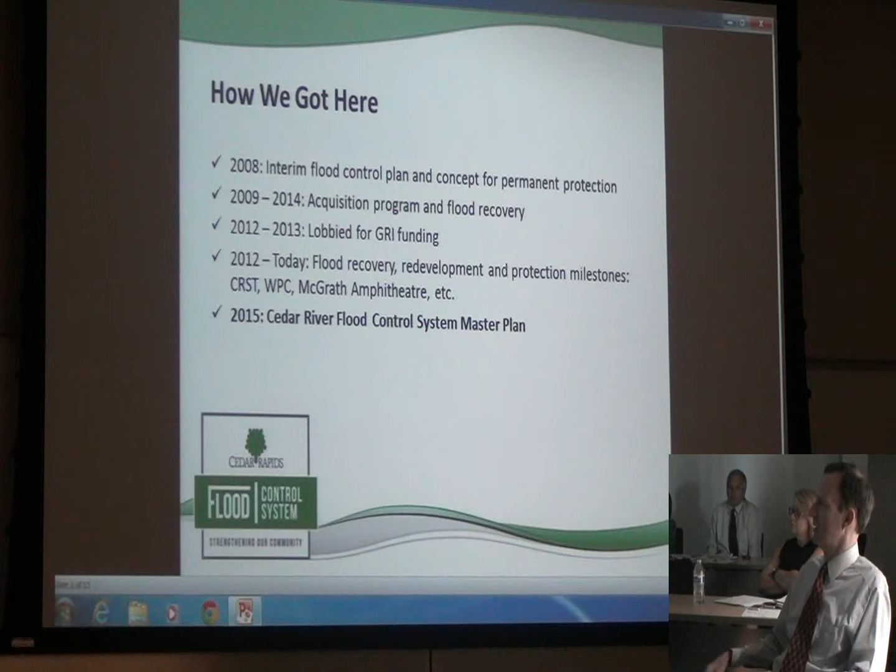And we've basically finished, we're out of the recovery, we've finished all the buildings. This was really one of the last ones. We're sitting here in the 2012 to 14 timeframe, finishing the buildings. And in December of 2013, we got the GRI approval, and the agreement was executed in January 2014. Now this is the culmination of, okay, we've got a funding source, let's get that master plan in place, because really before we had concepts, we had an idea what we wanted to do, but now that we have the funding source, we really need to validate what we were about to embark upon.

Next slide. So what is this document, this master plan? It's a guide for our construction for the next 20 years, which is the life of the GRI. It's going to give City Council direction on key policy items that will help the design team proceed with implementation of the flood control system. One of the things that's really important to note, I just said 20 years, there is no way this document is going to remain unchanged in 20 years. It has been set up to be changed, modified, amended, and have sections added as new policy items may come up.

It's also a tool for communicating to the public. Your question is? Rob, I don't know exactly in your presentation how much of this is stuff that we had to get state approval on when they approved the GRI originally. They have some say in what we do, to some degree, so it's not just something we can do all on our own.

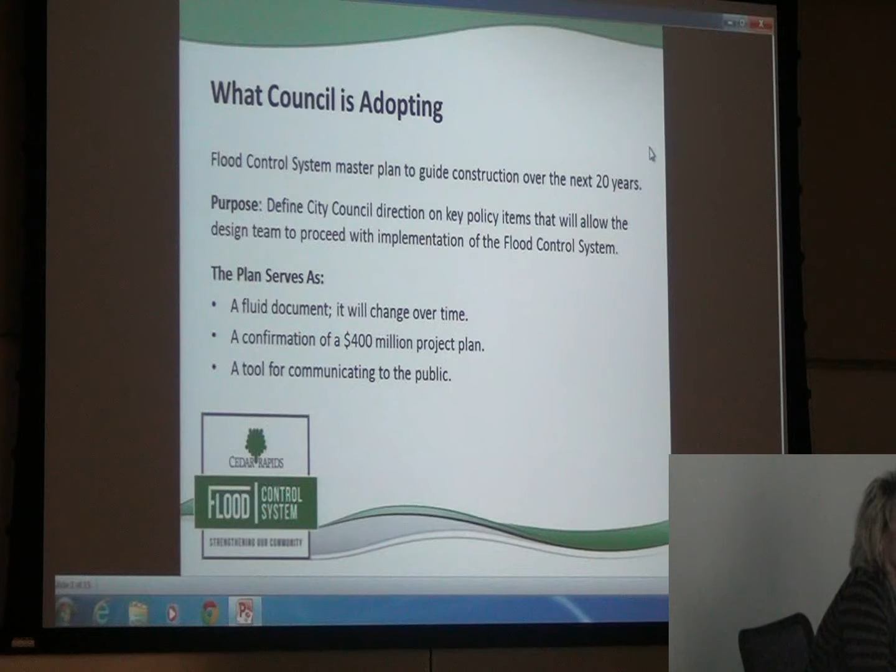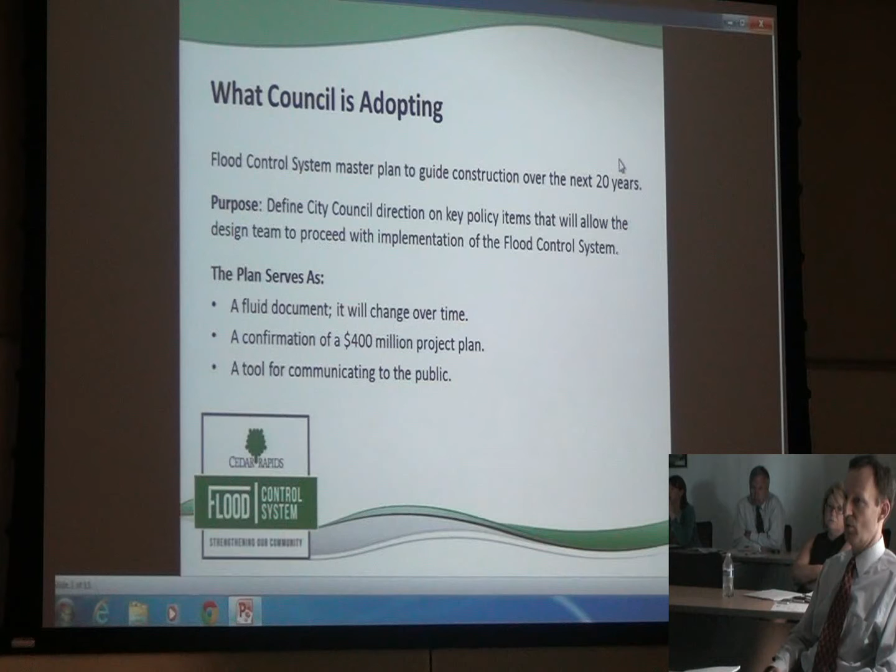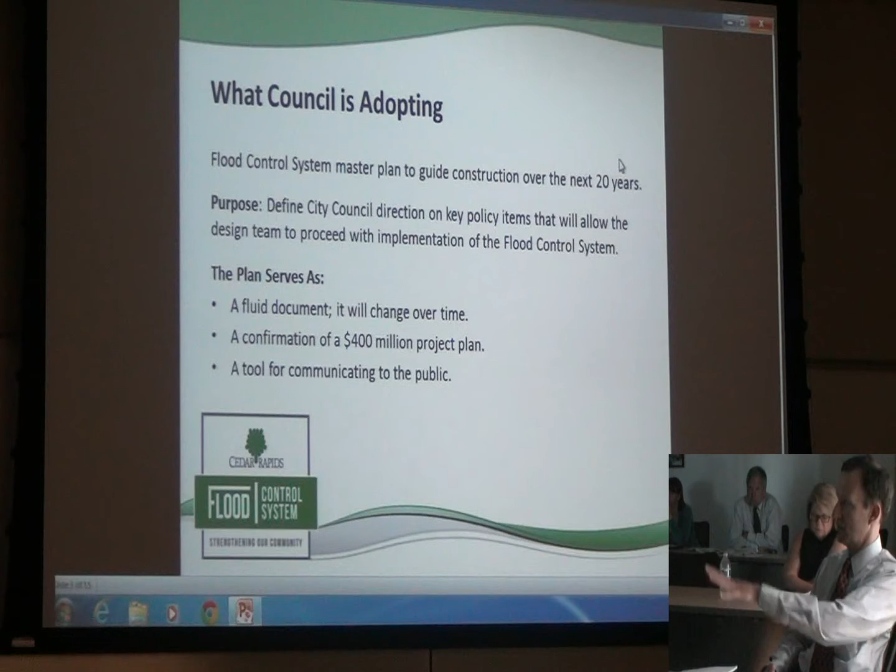Well, what I can tell you is you're absolutely correct, and this presentation I'm giving you today, I spent 2 hours with the state last week going through this document to make sure they are also on board, because they're paying 50% of the freight of this with their programs, essentially. So that's a very good point, and we will keep that relationship going so they understand what policy items are involved. They were very comfortable with this document, complimentary to the effort. So I think you have their endorsement, the state staff's endorsement, to move forward with this. And then what we will do after this has been adopted, we will upload this to their system so that all the flood mitigation board members can read it.

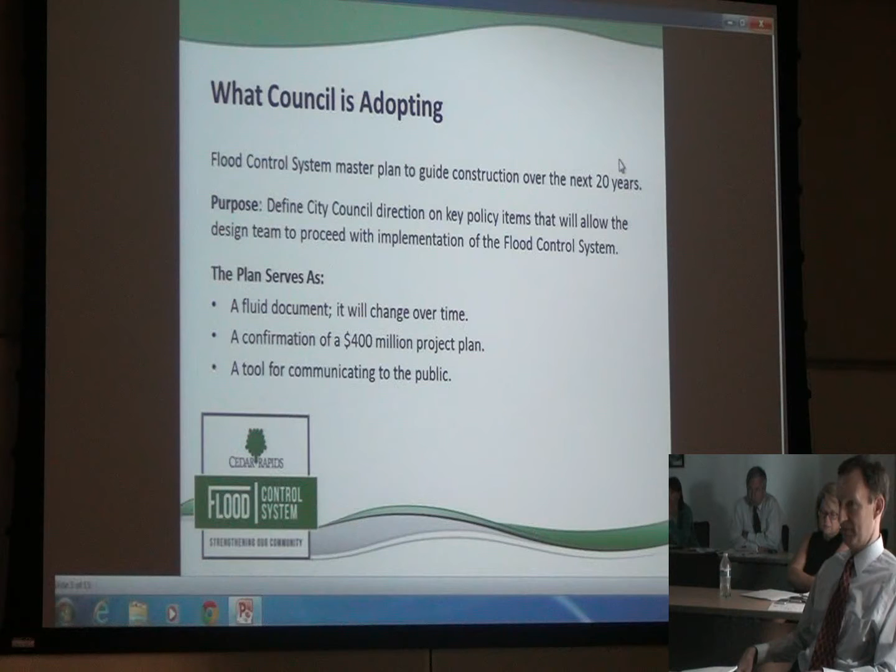Thank you. So I guess we can add tool for communicating with the state as well, Emily. So what does the master plan include? Well, it's set up in a series of chapters so that we can add chapters or add policies as items come up, so we don't have to redo the entire document. It's much like design standards or even the state code. When the state used to have state code, you'd have to replace certain sections, but they didn't reissue the entire book.

The initial adoption has an introduction, which is chapter 1, then an executive summary, then it goes into the actual plan, which is listed here as the alignment. It discusses what is recommended in terms of a wall, a levee, or a combination removable and permanent wall, where gates are proposed. It also talks about the height of it, and not only the physical improvement scope, but also where the project area is.

That's the area that's needed for operating the system, such as pump stations, temporary easements, or contractor staging areas to build the removable walls.

The other sections, obviously budget is important. That follows right after the actual plan. This is slightly out of order from the way the book shows. Then there's a section on implementation, which tries to lay out a roadmap for the sequence in which we're going to build these sections. It's divided into 8 sections plus Edgewood Road bridge approach.

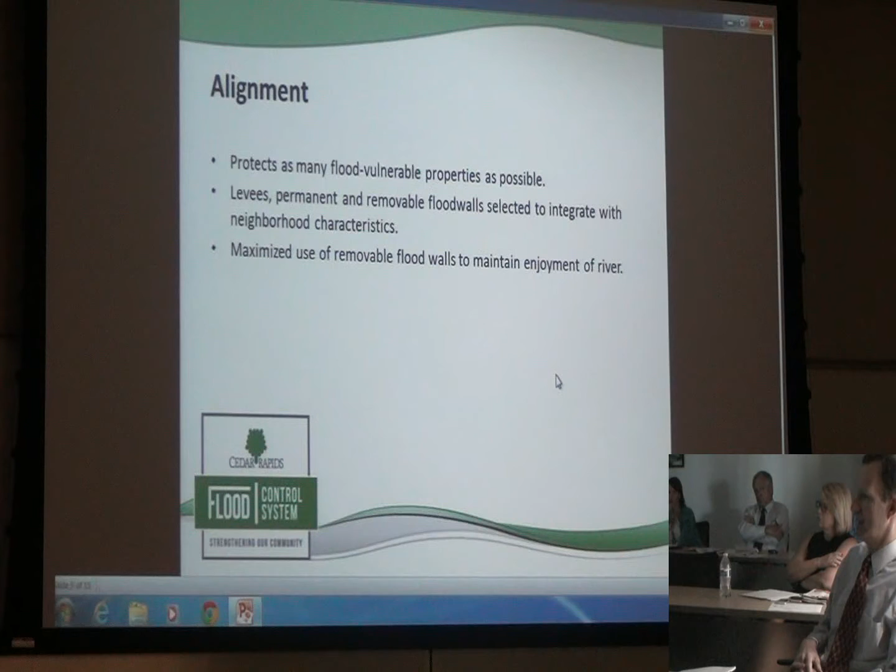Some of the considerations - this wasn't just done with a few people in a back room. I'm sure everyone knows this because we've had very significant public outreach. We've had 2 open houses. Council has provided guidance. We've had environmental reviews. We've had the State Historical Preservation Office review.

Significant discussions with the U.S. Army Corps of Engineers, as the east side is eligible for federal funding. It's not yet appropriated. We've met with the private and public utilities. Some of the other things were the view sheds. We've also talked to the property owners on both sides, individual meetings as we've gone through this, to get concerns and opinions as well.

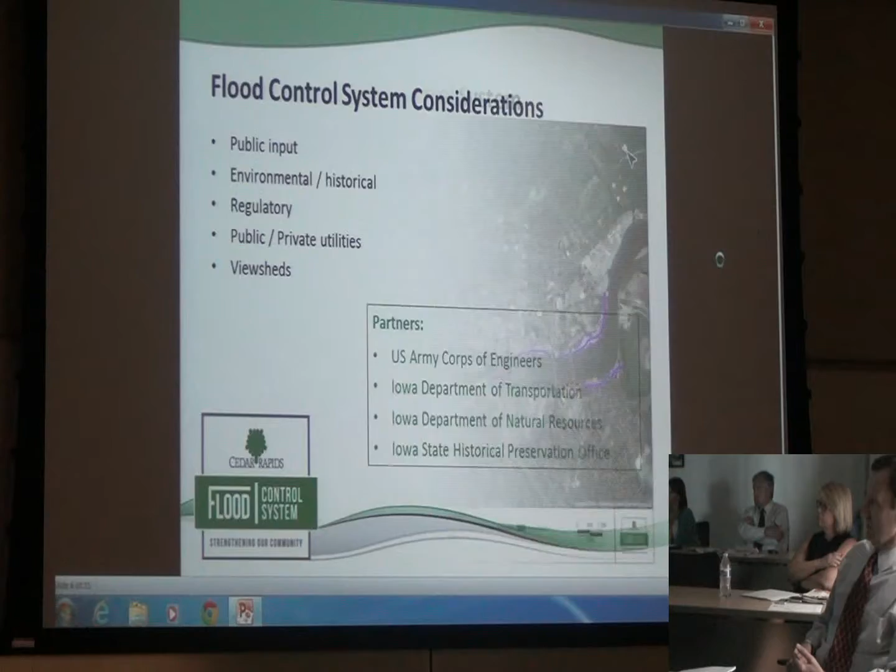So that leads to this map. If anyone wants to look at it later, there's the board right behind Rob and Cash here after we're done with the meeting. But this is essentially what's shown in the executive summary.

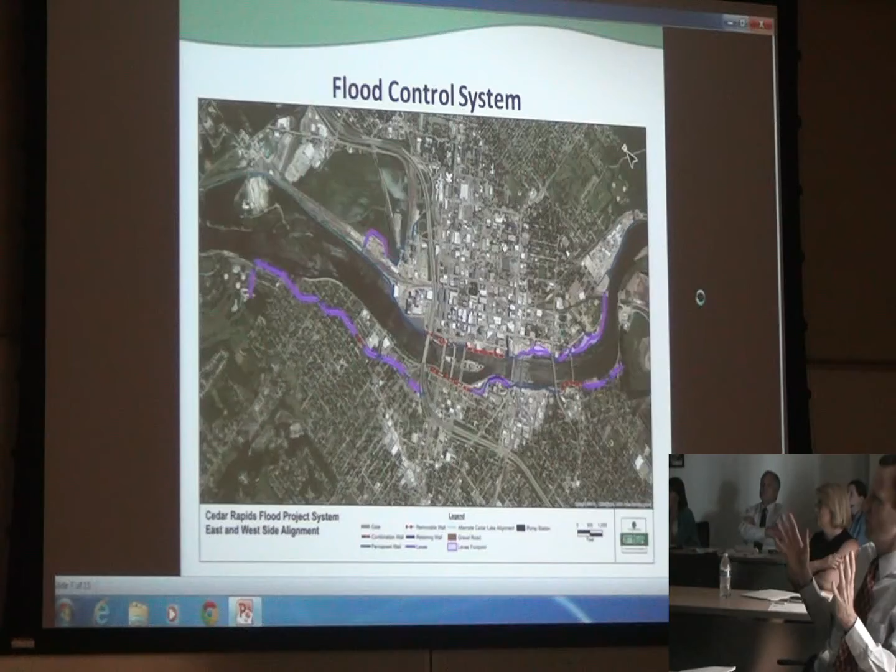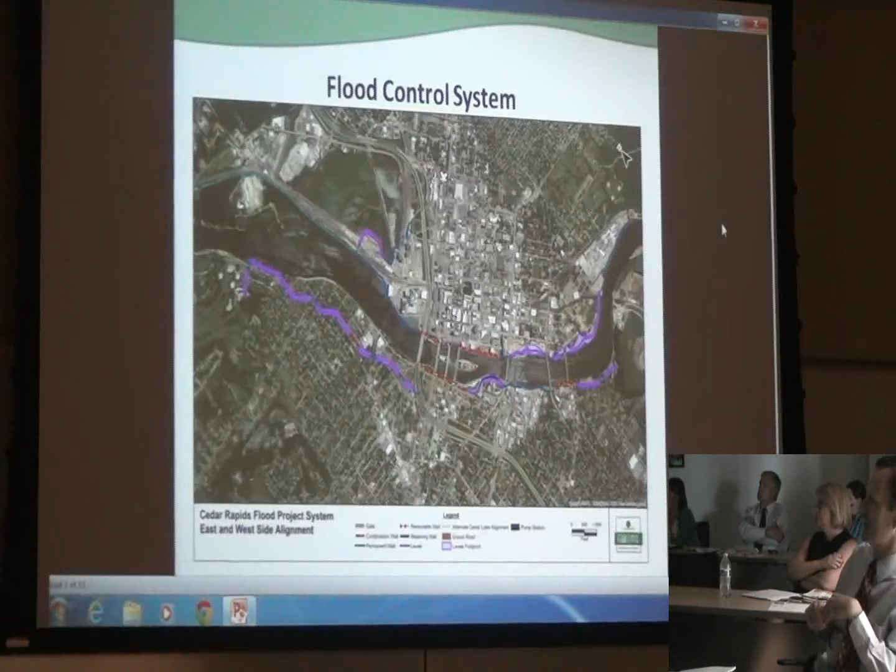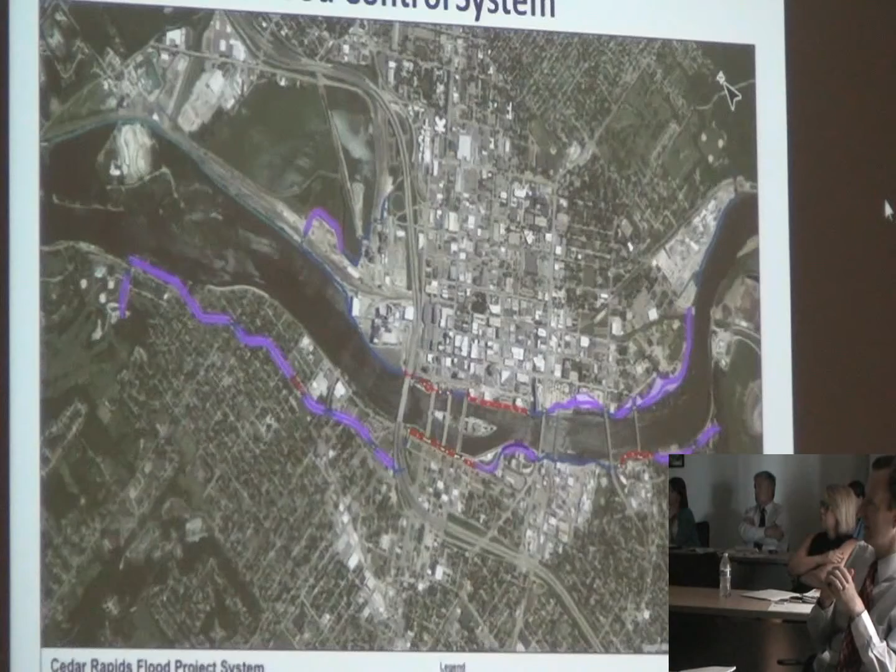That's the plan. The purple is the levee structure. Kind of hard to see all the different colors here, but the red is a wall, and there's gates, and then there's some kind of multicolored one which shows where the removable walls are. And as you go up from the Quaker Oats area, there's a dashed line that shows the option to continue this north along the railroad isthmus by Cedar, and protect the Cedar Lake as well as the Shaver Road area. But that's essentially, in a nutshell, what the system is.

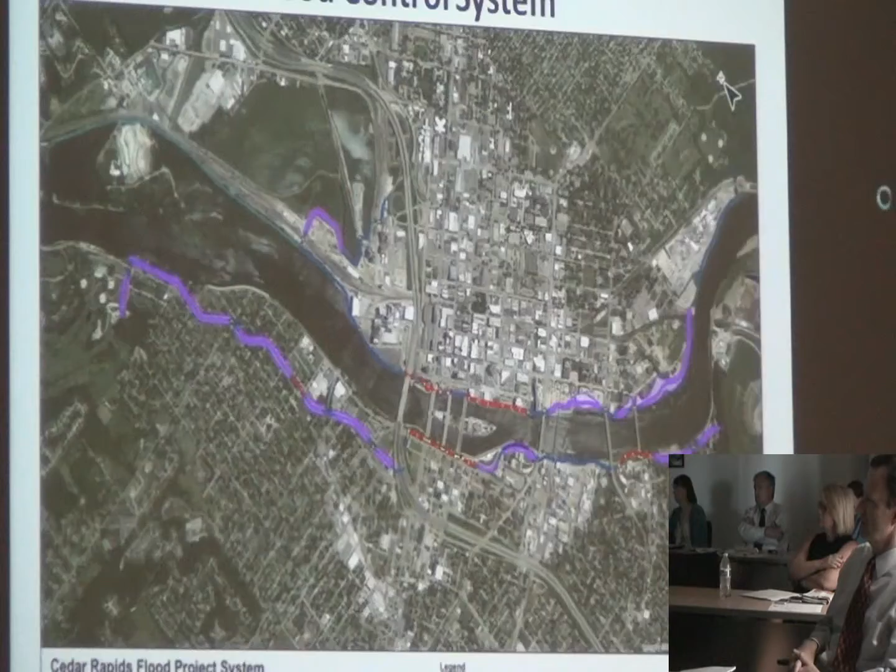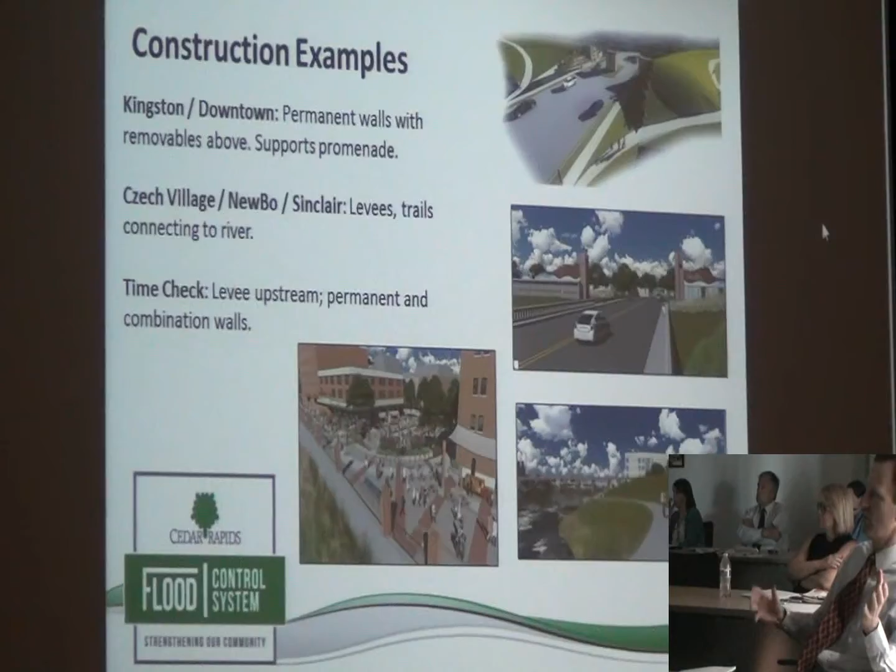This is a pull out right from the executive summary. Some of the highlights of where these different features go. In Kingston and downtown, there's more permanent walls with the removables above them, as there's more access to the river there. Czech Village, Newbo, and Sinclair have more of the levees and trails going over the levees to access the river. And then you've got Time Check, that's got a levee, but there's also a nice gateway element that provides access to the river.

A lot less on this - some of the other areas where the industry is, Quaker, Penford, Cargill, those are just permanent walls. So again, those are met with the integration of neighborhood. I think one of the terms maybe not used as much today is context-sensitive design. Those are picked to match the neighborhood needs.

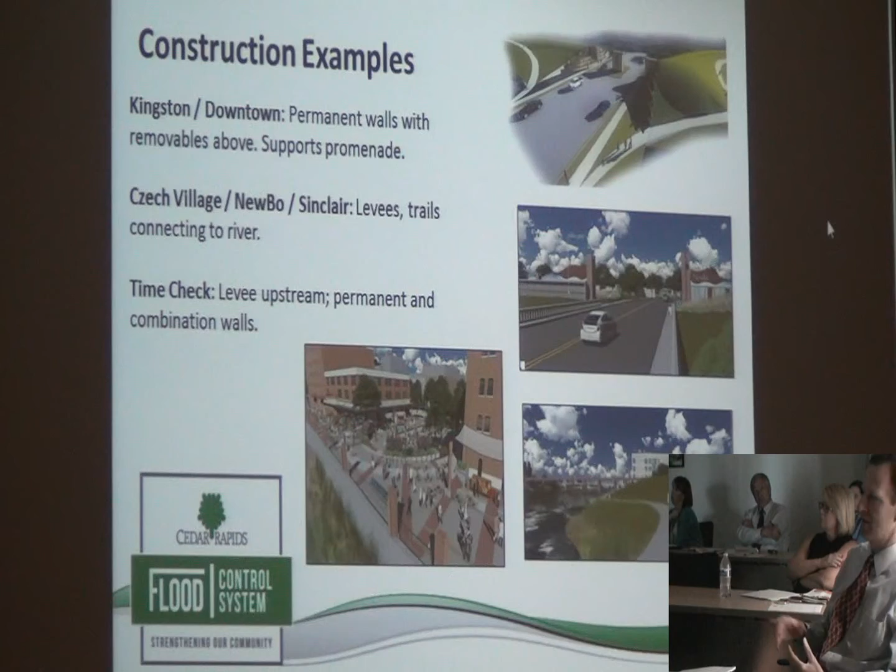And again, this isn't really all that different than what was shown at the public open house most recently. The chapter on implementation and sequencing really looked at a few items here.

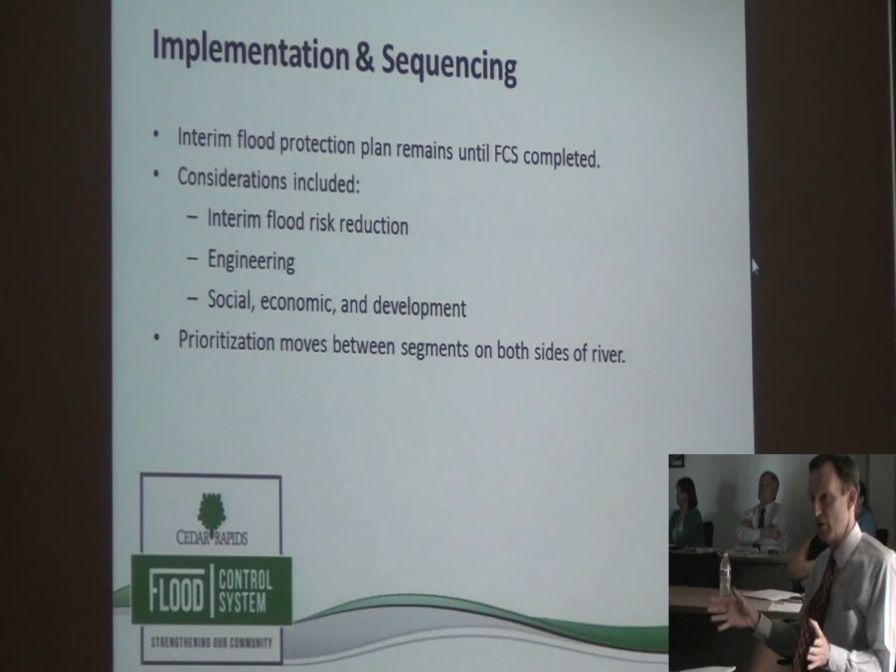There's an engineering component, and then there's a neighborhood socioeconomic development component. Those were combined together to suggest a prioritization between those. And what that does is it will be used in combination with our current flood protection plan for the interim. We've seen it with HESCO barriers and the cones we put up over the manholes. So between the segments being built, we will still use that flood protection plan in the meantime.

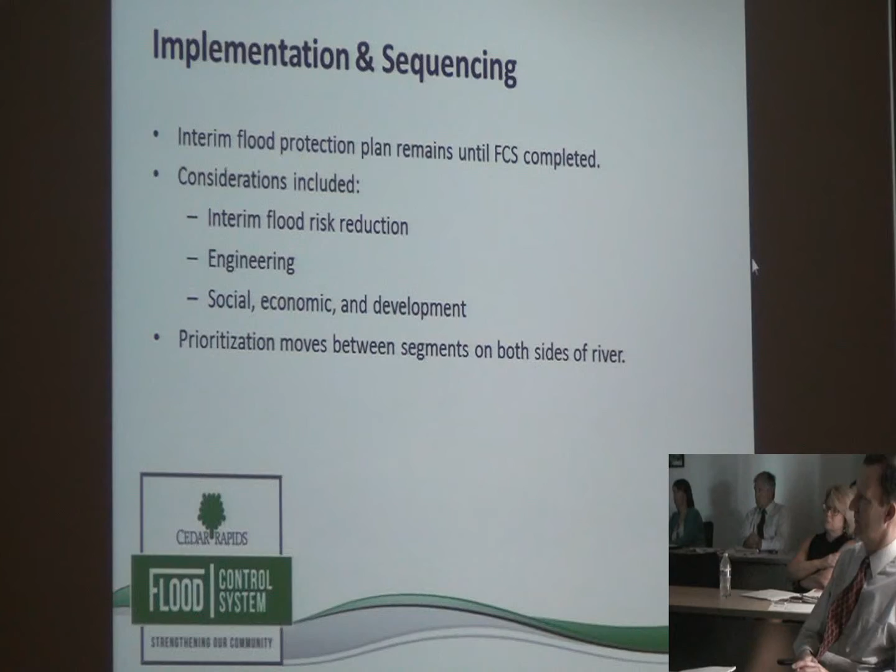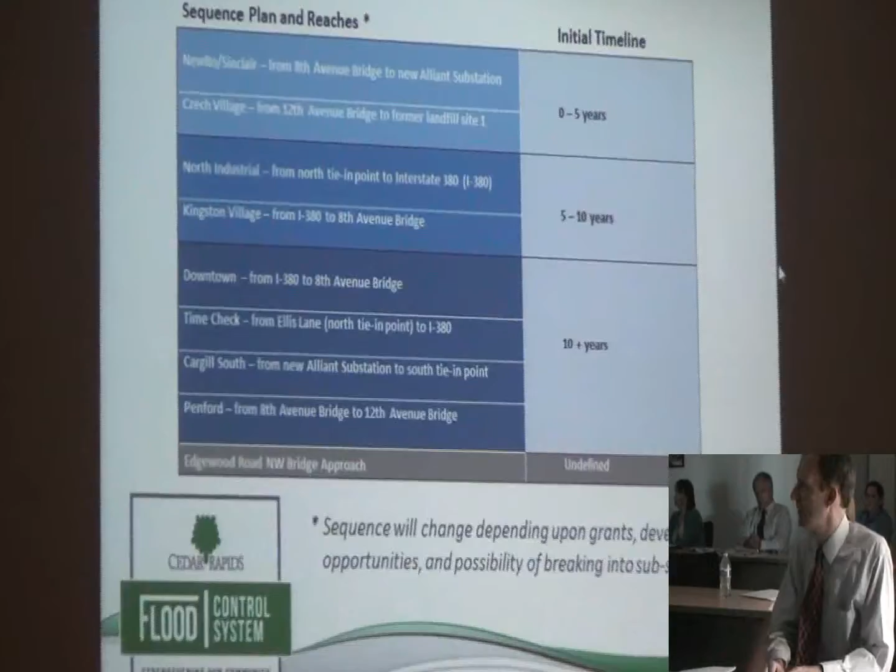And when those were all put together, the priorities came out where the segments will move from one side of the river to the other. It's not all one side and then the other. Klaus, you can move to the next slide. It's broken down into 8 segments here, but there may be some sub-segments we work on outside of this overall general suggestion.

So the first 2 areas are Newbo, Sinclair, and Czech Village that were listed as the top priorities. And we have a design contract with 2 firms right now, so we'll begin those concurrently. The schedule will vary somewhat depending on acquisitions, design issues, and permitting.

But Newbo Sinclair, for example, was scored highly because it sits low, and by putting in the walls and levees now, there is actually flood protection achieved, not to the 2008 level, but to the 100-year level or so. And we may recall last year, very intensive efforts by our sewer maintenance division to protect that area, and business went on as normal.

So if we can protect that area first, then we will have more time for the maintenance crews to do other things citywide. Czech Village also sits low.

That was one of the first areas to get inundated in 2008. But also when you start building things across the river in Newbo, Sinclair, that raises the water even more in Czech Village, so that's why that came right behind it in the second priority.

And then there's kind of the intermediate category, the 5 to 10 year time frame. This is the north tie-in to Interstate 380. That is the Army Corps of Engineers top section they would like to work on.